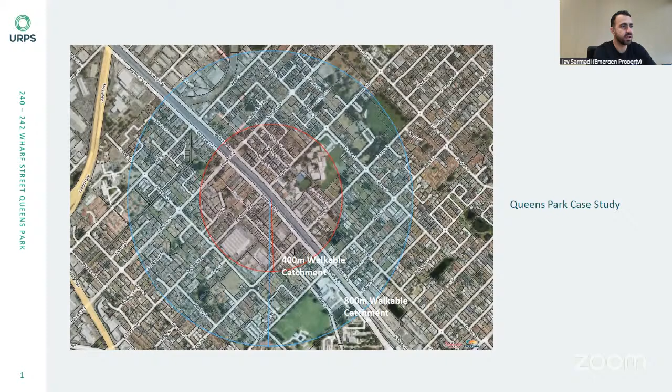Emergen Property specializes in medium density infill developments and brownfield developments with a strong emphasis on providing high quality, affordable housing across the Perth metro area. Our primary consideration for this site was how do we create a commercially viable proposition while meeting the overarching objectives of the Queen's Park Frame Precinct.

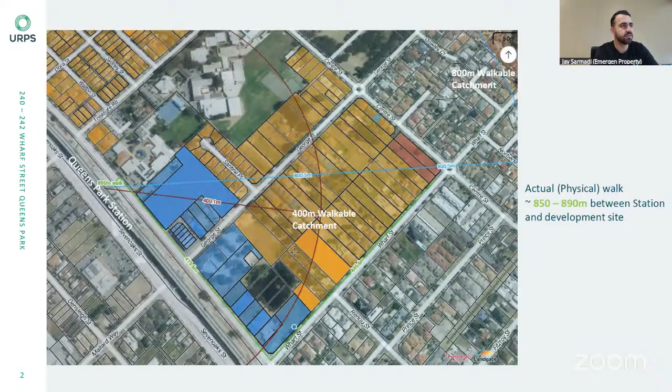Although the preferred use of the site is noted as multiple dwellings rather than group dwellings, which is what we're delivering, the current commercial constraints facing affordable apartment developments in Perth, showcased by the extremely few number of affordable apartment projects being proposed or planned by the private sector, prompted us to design a project that is feasible in the current construction climate while delivering on the city's high-level built form objectives for the site.

Our aim was to achieve the desired look and feel, affordability and diversity of a multiple dwelling project while providing a superior built form outcome compared to the traditional walk-up units that would have been envisioned for when this precinct plan was approved almost a decade ago.

The two-storey product appeals to young local families and first-home buyers, while the single-storey dwellings set a benchmark in affordability and accessibility, with most of them offering silver accessible provisions and pricing starting from only $469,000.

As our consultant presentations will highlight, we believe the project aligns with the intent of the structure plan and the medium density codes, delivering the desired density contemplated by the LSP for the site.

The distinction between grouped and multiple dwellings should not be the sole factor in determining this project's merit. We believe that this is the primary reason for the city's recommendation to refuse the application, while not giving due regard to other aspects of the project.

I would like the panel to contemplate, in light of our consultant's presentation, as to whether this is sufficient ground for this application to be refused.

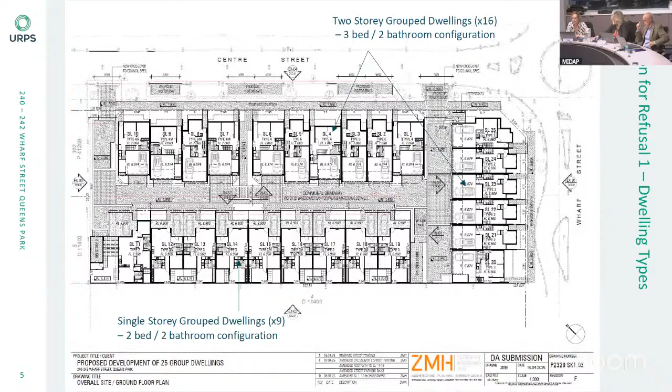Okay, keep rolling. Yeah, we respectfully submit that the majority of concerns raised by the city are perhaps superficial and overly procedural, engineered to reinforce an inflexible interpretation of the structure plan rather than engage with the actual planning merit of the design. This is particularly evident in reasons 1 and 2, where discretionary elements are presented as prohibitions, undermining a balanced and outcome-based assessment.

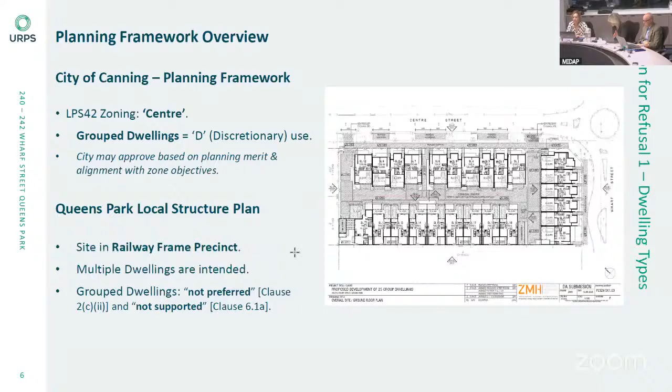The reasons for refusal 1, which is related to the dwelling types. The first reason for refusal relates to the use of group dwellings in the railway frame precinct, which under the structure plan describes as a non-preferred use.

However, the statutory instrument here is the local planning scheme, which zones the site, Centre, grouped dwellings as a discretionary D use. Now that D use is citywide.

Clause 2(d) of the structure plan explicitly allows the discretionary uses where they align with the character and objectives of the precinct. That's exactly what this proposal does. It delivers medium density housing in a form that is responsive to context, feasible in the current market, and aligned with the precinct's objectives of intensifying residential development near the train station.

Group dwellings also offer a tenure model that is more attainable and immediately deliverable, supporting housing diversity and fee simple ownership, both of which are highly relevant in today's market conditions. In short, this is not a departure from policy intent. It is a practical and policy consistent response.

Reasons for refusal 2 assert that the proposal fails to meet the minimum densities set out under clause 6.1 of the structure plan, which identifies an R40 to R80 target for multiple dwellings. But the real objective is not the dwelling type, it's the density outcome we're trying to achieve in this precinct. This proposal delivers 25 dwellings on a roughly 4,000 square metre site.

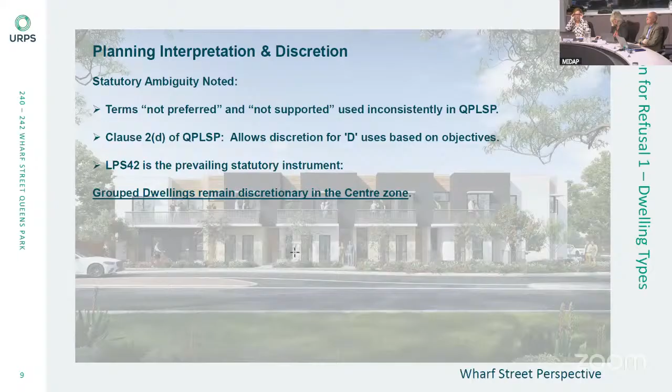The RAR cites R40 as a minimum development of the site. At R40, the maximum plot ratio would be 2,400 square metres. The plot ratio of the proposed development is 2,550. Therefore, the development is actually slightly larger than the minimum R40.

With regard to open space, the 2-bed units have split courtyards, one of 18 square metres and the other of 10, achieving greater than the 20 square metres required under the medium density codes.

The 3-bed units all have inverted living, that is, the living rooms are on the first floor, so they're not really directly accessible to a garden. However, each living area opens directly to a balcony that exceeds the minimum area required for multiple dwellings.

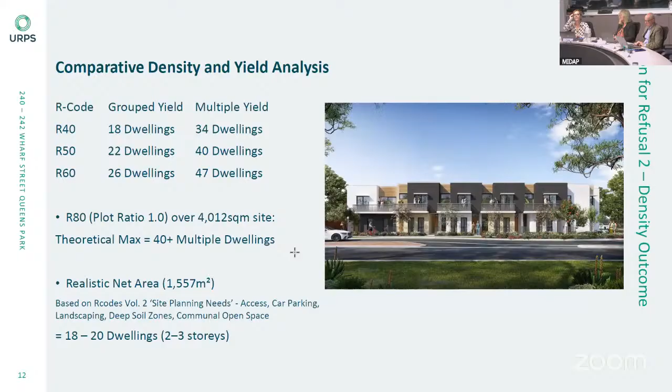The difference between the built form of a 2-storey multiple dwelling development and a 2-storey group dwelling really wouldn't be discernible in terms of the desired outcome. And I think in some ways the aesthetic of the group dwellings is actually better than the multiple dwellings.

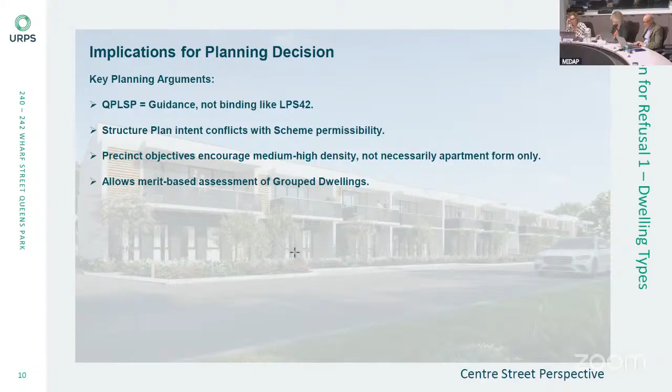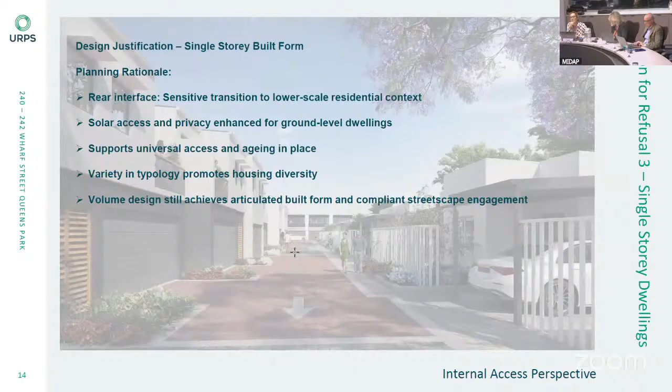All of the 2-storey dwellings have front doors facing the street, and the single-storey dwellings, through a break in the building, have a separate landscaped strip that gives access to the rear and onto a shared space off the street, with regular access.

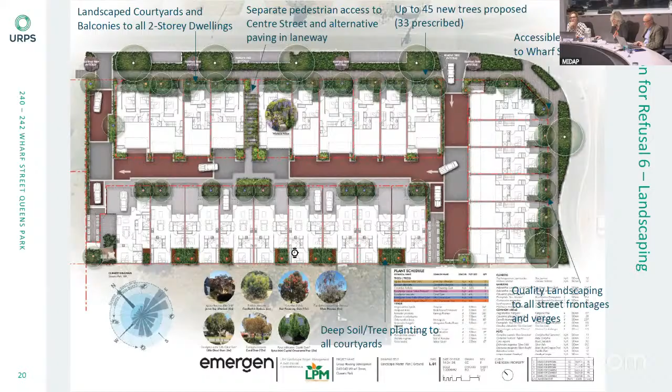The one-way traffic system developed for the street system is a much safer environment than if it was two-way traffic.

All of the primary courtyards and balconies face either northeast or northwest, so that applies to every dwelling.

The RAR referred to the northern bin store as having an impact on the amenity of Lot 11. That's not the case, because the bin store is actually fully enclosed, so the smells and things are not going to affect the courtyard or the outdoor living area of Lot 11.

In terms of amenity, it should also be mentioned that this site is within 150 metres of the public open space at Queen's Park Reserve. I'll leave it at that. Right, you've just got a couple more minutes left on your time frame.

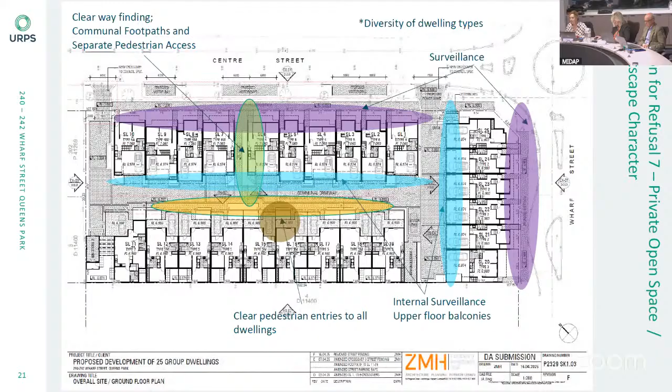Good morning, presiding member and panel members. Today I'll be speaking in support of the application with matters relating to traffic.

In summary, the proposal adopts a one-way looped internal circulation system with vehicle entry from the southern crossover and exit to the north. This layout improves operational efficiency, reduces internal conflict points, and has been thoroughly tested using swept path analysis. The RAR expresses concern regarding the internal road width and shared pedestrian use.

The internal road varies from around 3 metres to 5.7 metres in width and is designed as a shared zone. The adjacent pedestrian path is flush with the carriageway and increases the available manoeuvring space for vehicles. The use of shared zones is well established in medium density contexts with low speed, low volume environments, and here we expect around 12 to 14 peak hour trips.

Internal vehicle speeds will be maintained to under 10 kilometres per hour and sightlines are clear throughout the development. The applicant proposes to install 10 kilometre per hour shared zone signage to enhance safety and compliance with that shared environment. The visibility and safety of the entry crossover has been assessed by myself.

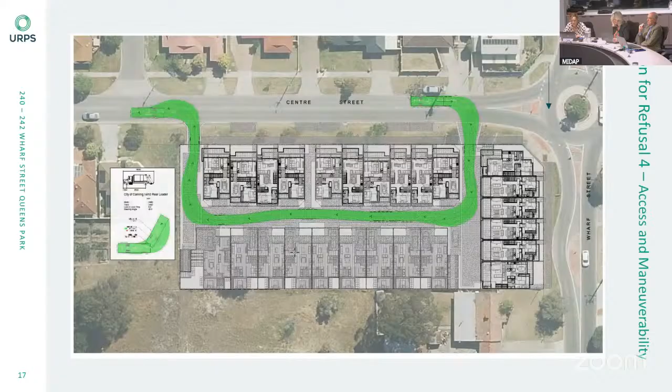Vehicles turning left into the site are expected to be travelling at around 20 to 25 kilometres per hour. You can see on the display the sightline analysis we've undertaken. It confirms over 30 metres of clear visibility approaching that crossover, which exceeds the sight distance requirements.

So we did the sight lines for all three approaches of the roundabout. I'm not sure if they're all in there, but we did for all.

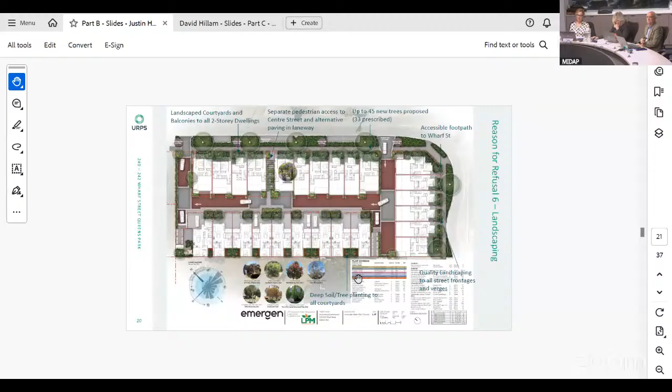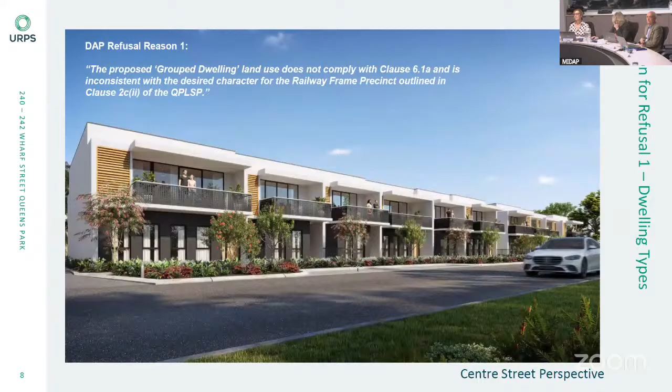Now the walkable catchment - I think the RAR reports that we're 500 metres from the train station, more like a kilometre from walking distance. So we are on the absolute edge of that frame precinct, which is essentially a mandate for multiple dwellings. If you compare that in context to overlay 800 metres over at Claremont or Subiaco, no chance would you achieve multiple dwellings for that whole precinct. So from a context point of view, what we're providing is two-storey outcomes facing the street, providing that streetscape appearance.

If we were to retrofit some of the apartments or some of the dwellings to apartments, would the bulk and scale of the overall development change? Probably not. If you did a pub test of standing on the street and looking at this development, whether we're looking at multiple dwellings or grouped dwellings, I don't think many would be able to tell the difference. So from a context point of view, those developments already built in there are single storey grouped dwellings, but this is prior to the structure plan, which came in and mandated that everything should be multiple dwelling in that area.

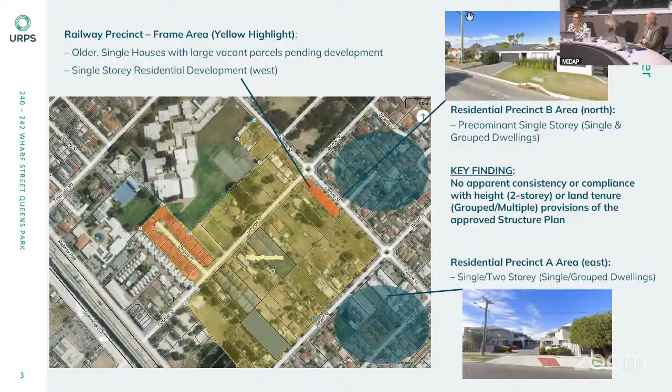Commercially, providing those same provisions on a Subiaco or a Claremont, why aren't they there? We're designing for Queen's Park. It's very hard to justify providing, with an 800 metre catchment, apartments across the whole thing. So, has the structure plan been originally questioned to the nth degree? Was it a viable structure plan in the first place? I'll probably say no, it's not. The realities of apartments across that precinct - great in theory and utopian planning, but in reality, no. The tenure there is probably a more viable option.

And in response to your last comment, obviously as a decision maker, we have to have regard for the structure plan. In terms of process, we can only rely that the process has been diligent and consistent with legislation, and we've got no reason to question that. Thank you, Presiding Member.

Just to go back to the issue of the reports and documents and what we've got before us, just so that I'm clear - you're comfortable that the drawings, which are attachment 1 to the RAR, the development plans, show the changes that you have made as a result of the comments you received about the manoeuvrability? I'm going to break the questions down, so that's my first question. Yes, that's correct.

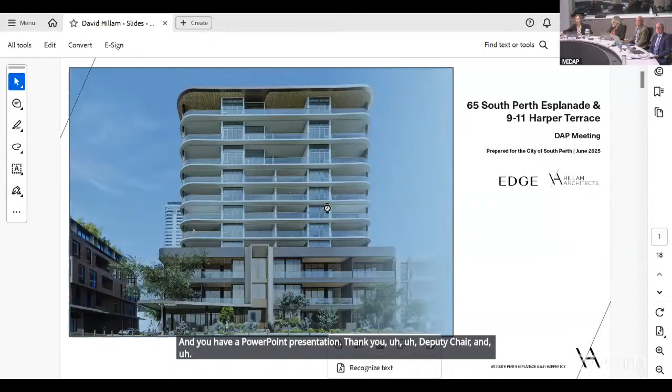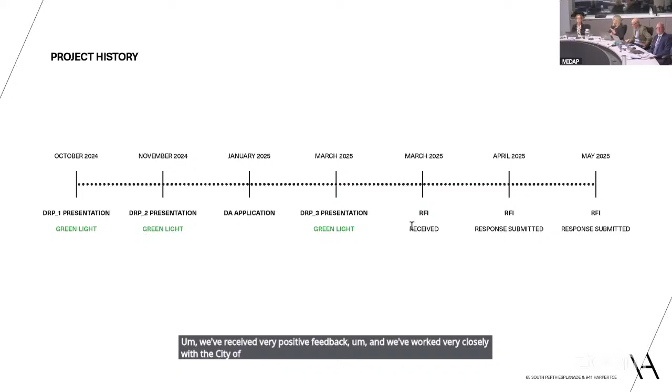I just wanted to review the process we've been through. We've been through 3 meetings with the design review panel. On each occasion we received very positive feedback, and we've worked very closely with the City of South Perth to address all issues raised by the city in order to achieve a recommendation for approval.

Sorry, this is a bit slow. The project is a mix of ground floor commercial tenancies and premium quality residential above, including a rooftop terrace.

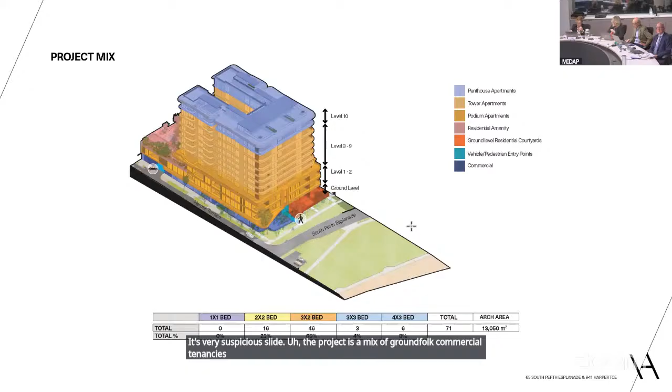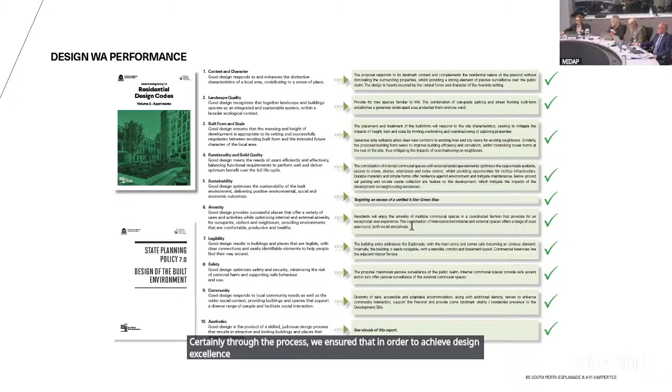Certainly through the process we ensured that, in order to achieve design excellence, we exceeded all the requirements for Design WA. Going back to the project outcomes we're aiming for, certainly a premium quality development - we wanted to provide a contextual response. That was very important, and we were very focused on the streetscape experience and improving public and private amenity. The project, importantly, achieves an average 7-star NatHERS and a 4-star Green Star rating.

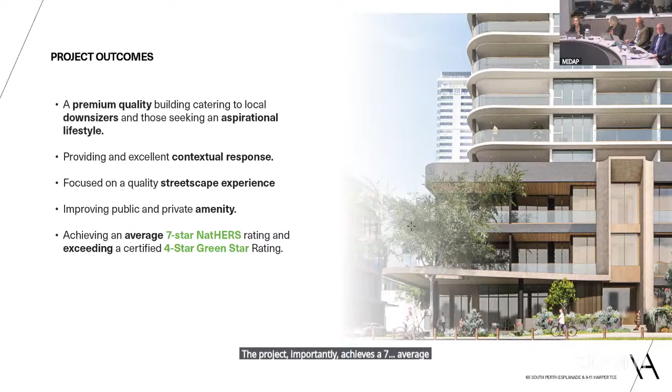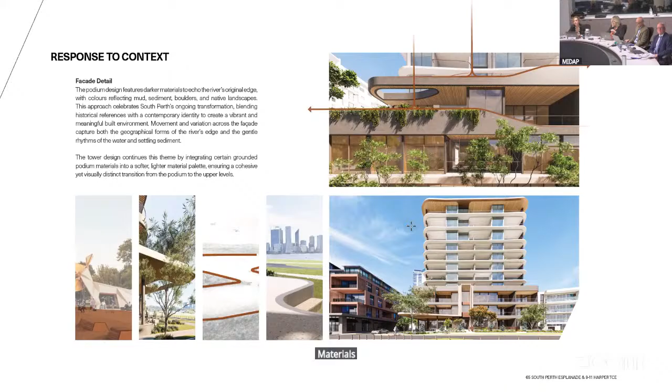It's interesting, in our design we looked at both the historic context of the site and also the contemporary context. In responding to that, we wanted to bring back more of a historic context, particularly in the podium materials. A lot of projects in this precinct have a very contemporary response, and through the design of the podium and the landscape elements, we've certainly tried to bring some of that historic context back into the project.

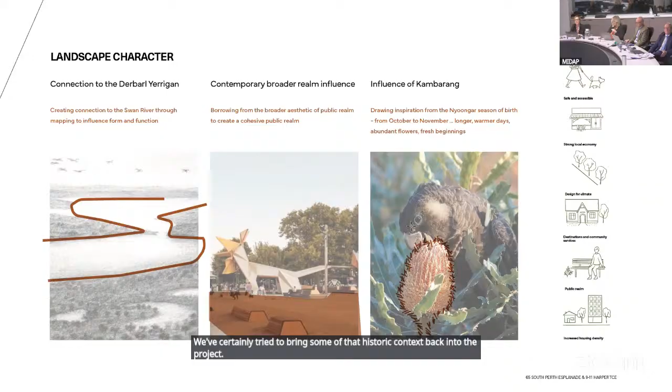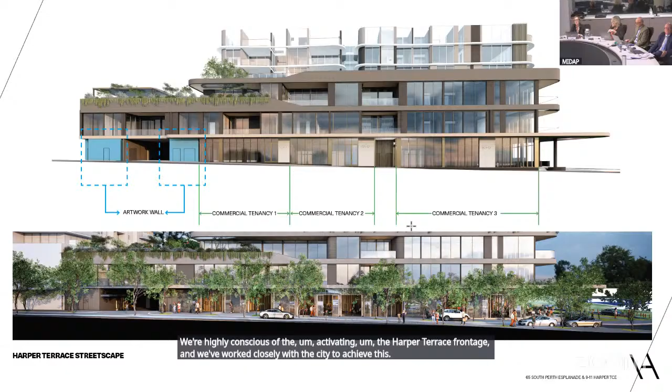We're highly conscious of activating the Harper Terrace frontage, and we've worked closely with the city to achieve this. We have sleeved the car park and achieved maximum activation of the street.

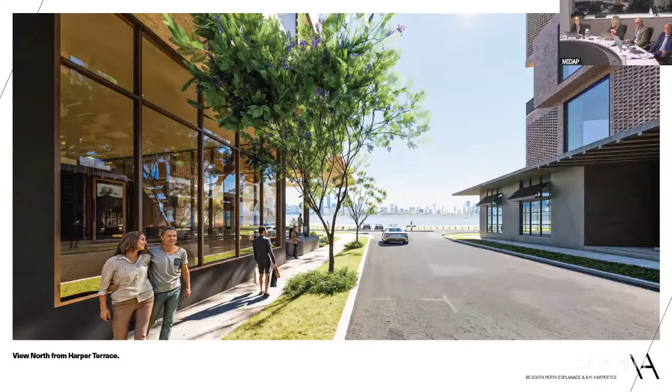The cafe tenancy on the corner provides an active community benefit, as it activates that corner of Harper Terrace and the Esplanade.

Another important element in the design was the transition from commercial to residential. We thought carefully about that transition, where the commercial is focused on the eastern side of the site, and purely residential on the western side.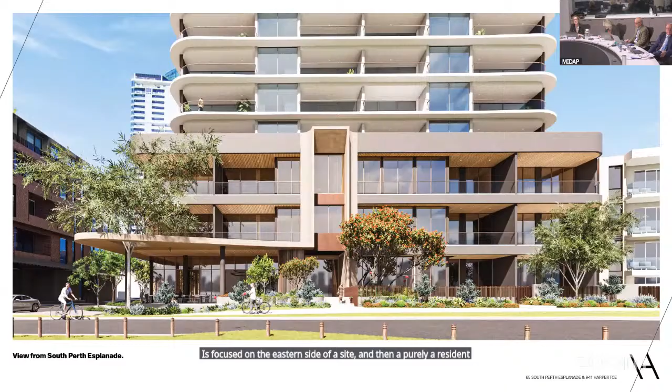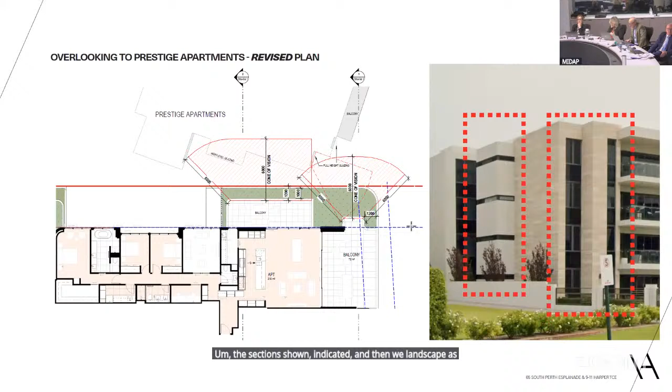There's one condition relating to privacy and amenity we'd like to discuss. We acknowledge the existing condition. It was our intention to screen the side boundaries, but we take on board the city's feedback. In addressing that condition, we suggest a minor variation, where we can screen the sections indicated, and landscape the front portion of the site as per the city's recommendation, where there's an opportunity to look backwards onto the existing property.

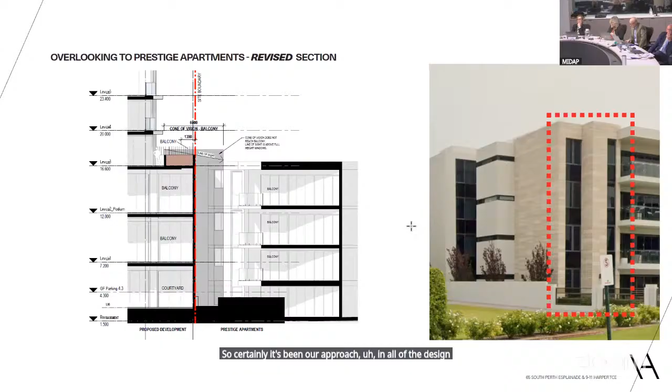It's been our approach in all design elements to consider the neighbours' privacy, and through the podium we expect to achieve that result. We believe the city is satisfied with all other elements of privacy up through the tower structure. That's our understanding. Thank you.

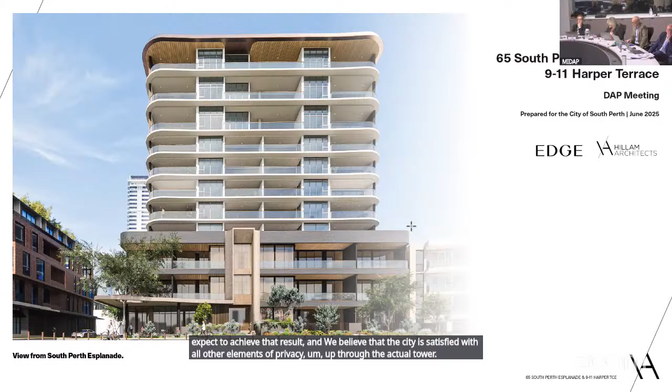This is on a prominent corner of Harper Terrace and South Perth Esplanade within the activity centre. The proposal is closely aligned with the city's desired future character for the area, and will make a positive overall contribution to streetscape and skyline of the locality. This opportunity stems from the assembly of existing lots in multiple ownership to realise this key corner development site. The proposal has undergone rigorous assessment by the city's planning team and the design review panel, with the crucial awarding of design excellence having been achieved.

The city has also supported the proposal from a land use and built form perspective, recommending approval subject to fairly typical conditions. As set out in my written deputation request, we are requesting some minor wording changes to conditions 6, 7 and 13C, and we understand the city is in agreement with those changes. I'm happy to take questions now.

With regard to condition 5, Roman numeral 6, David has just presented the proposed additional landscaping arrangement for the northwestern side balcony of apartment 301. It's respectfully requested that this arrangement form part of the approval.

This provides an improved visual privacy interface to the neighbouring property, having regard for both the existing condition and future redevelopments of the area. We acknowledge the objection just presented on behalf of the owners of that neighbouring building. This proposal is consistent with the envisaged built form and scale for the activity centre, which inherently contemplates some reduction in the enjoyment of visual privacy within the precinct as properties are progressively redeveloped. We also note the setbacks and visual privacy elements have been supported by the city in its report, which acknowledged that change in expectations for visual privacy within the activity centre context.